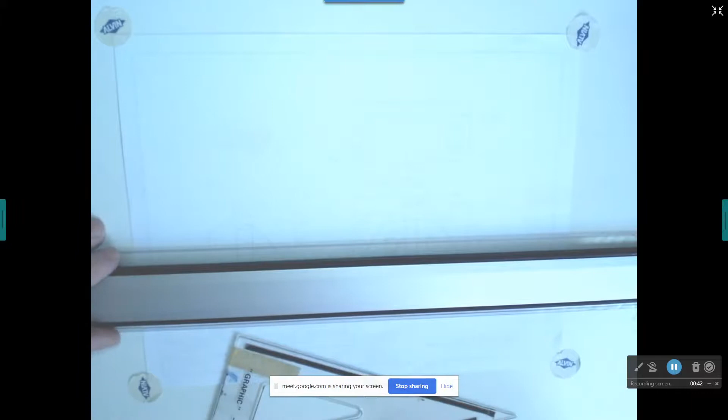So I'm going to move over here to where my drafting table is, and I've got my little portable drafting table. I'm going to show you my triangle here. This is a 30-degree triangle with a 60-degree corner down here and a 90-degree corner up here. We call this the 30-60-90-degree triangle.

And I'm not going to depend on this to draw. I don't want you guys to think that when you draw isometrically you have to have a triangle, but I want to make a point with this triangle.

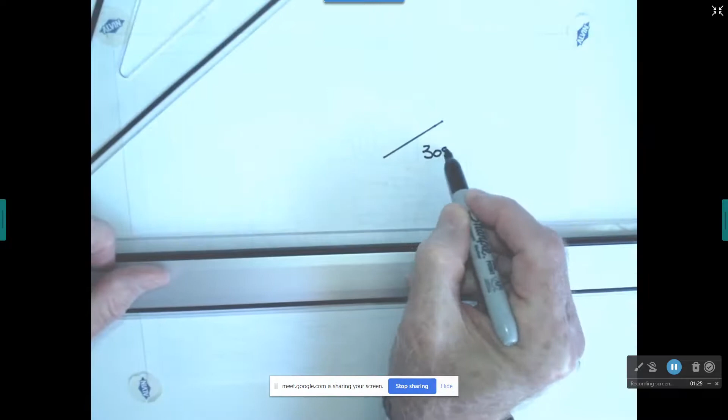So here's what I'm going to do. I'm going to flip this guy around here, and I'm going to draw just a line. And the line that I'm drawing here is at a 30-degree angle, and that's 30 degrees if I measure it to the horizon, like that. Okay, and I'm going to flip the triangle over, and draw another 30-degree line, and put a little 30-degree mark on that.

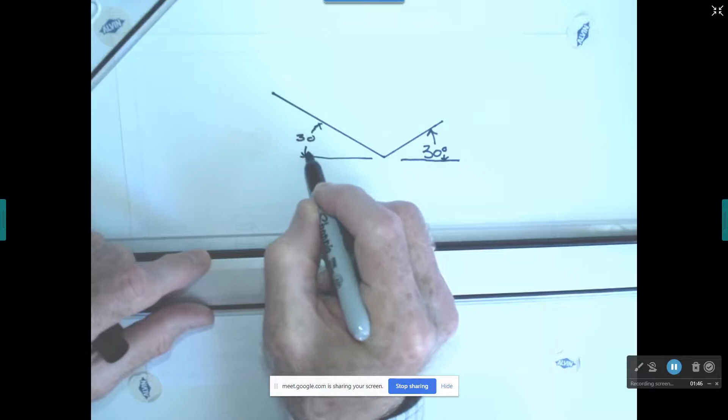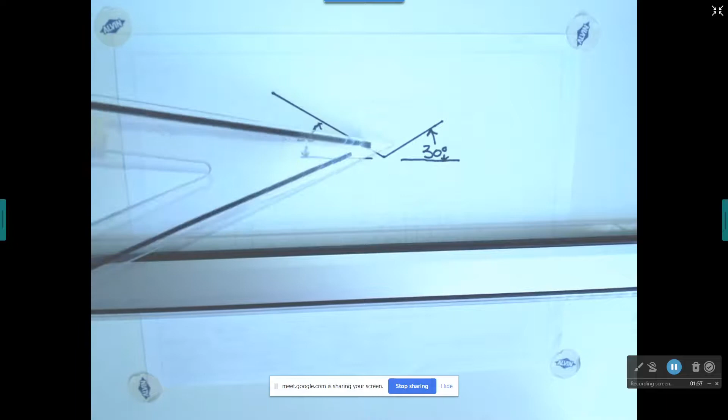So in isometric drawing, you have three axes, and if the planes that you're drawing are normal, not inclined, the angle of the lines you're going to draw in your isometric drawing are going to be at 30 degrees. Any vertical lines you draw are going to go straight up like that. So right there you have the corner of an isometric sketch or an isometric drawing.

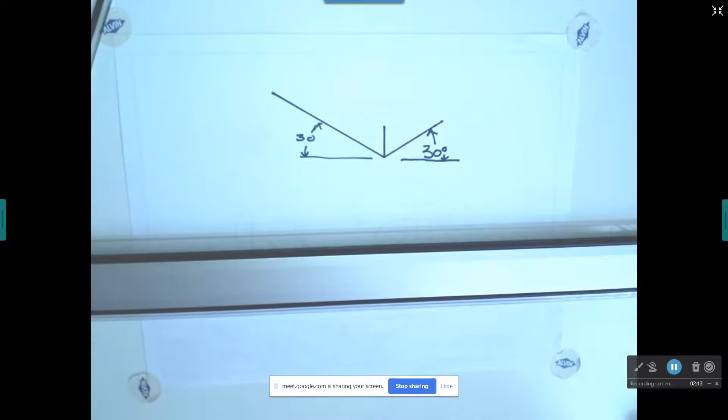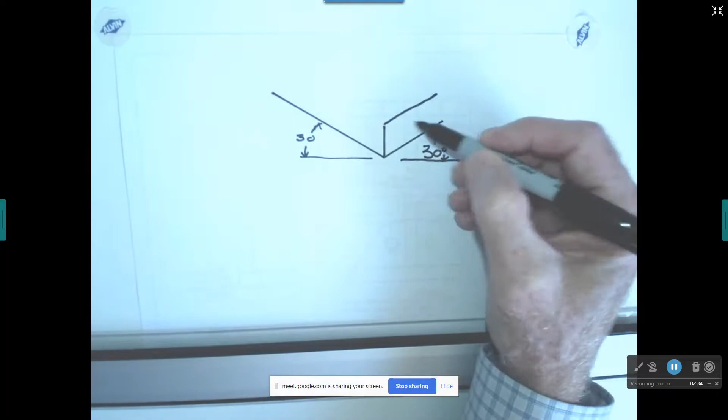Now what I'm going to do, I'm not going to rely on this guy. I'm going to switch over and just sketch freehand now, because the important thing is that you get a concept in your mind of what 30 degrees is, and that you sketch along a 30-degree angle, and you sketch parallel, like in this case it's a perfectly 30-degree right down here.

But you know, when you're sketching out there in the real world and you're doing this real quickly, you're not going to be exactly at 30 degrees, but you want to be close to 30 degrees. And you want this line here to be vertical.

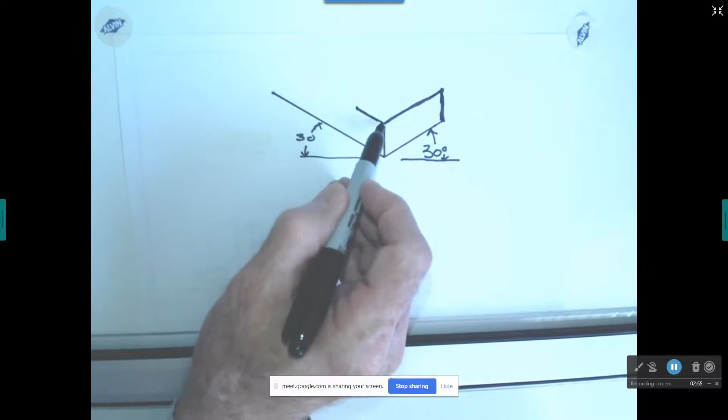Now, over here, I'm going to take this line and run it parallel to where that one was, and come out a little ways. Then I'm going to run a line parallel, running this guy in at 30 degrees, and where they meet, I'm going to stop. So I've created a plane there.

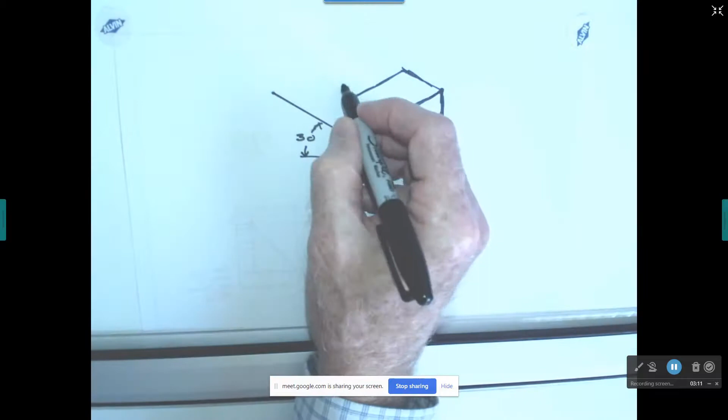So now you're starting to see that this thing is starting to look a little three-dimensional. So I'm going to go a vertical line here and a vertical line here, and I'm going to take this guy at 30 degrees, bringing this straight up like that.

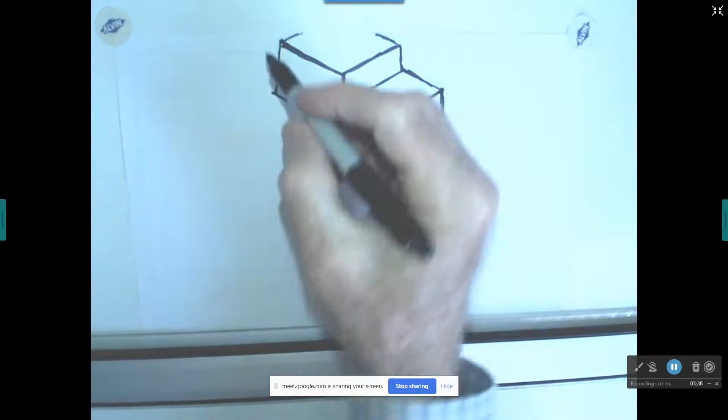And then I would bring this across, and bring this back, kind of having to draw this up near the top of my page because there's several things I'm going to draw on here. But there's sort of an example of an isometric drawing, and so vertical lines run vertically, and horizontal lines run at 30 degrees.

And sometimes, though, you're going to have holes added to those drawings. So there's a couple of holes drilled down through my isometric drawing. If I had holes on this plane over here,

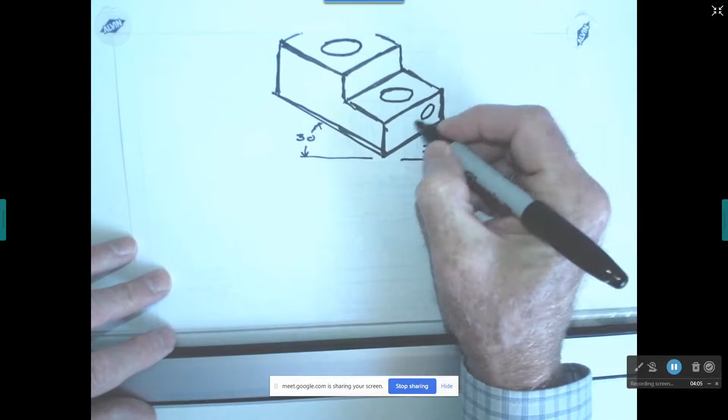they would run at this angle, like right there. And you can see that the angle of the holes that are on these planes up here and the holes over here on this side angle are running at a different angle. And over here and over here you have different angles as well.

Okay, so those are ellipses that represent holes, and those are oriented correctly in this drawing here. And I'm going to explain how you do that, how you know where to put these.

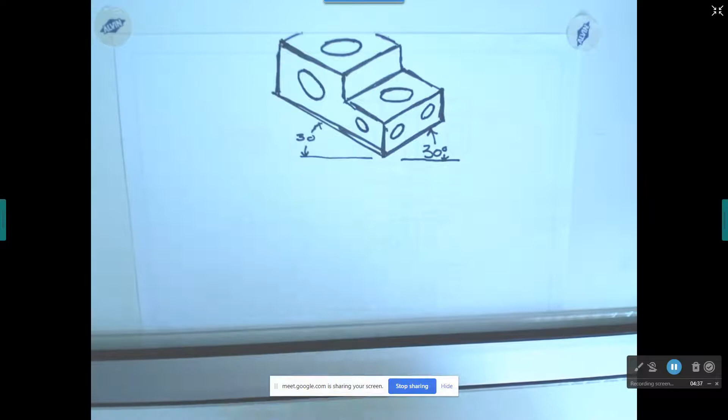Okay, so the first holes that I drew were these guys up here, and I'm going to put some marks on this plane right here so you can kind of highlight that plane. This plane right here is called a horizontal plane.

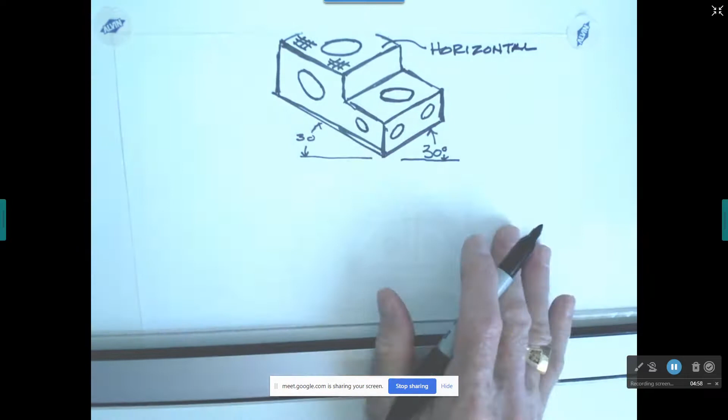All right, because it's parallel to the ground or the horizon, right? We refer to that as a horizontal plane. Now, that's the actual correct word for it, or terminology for it. AutoCAD calls this an isotop plane, like that.

Isotop was not a word that existed until AutoCAD came along. They started working on figuring out how to do isometric drawings, and I think they didn't know the concept of horizontal plane, so they called it isotops. That's what you'll be seeing today when we start working with AutoCAD.

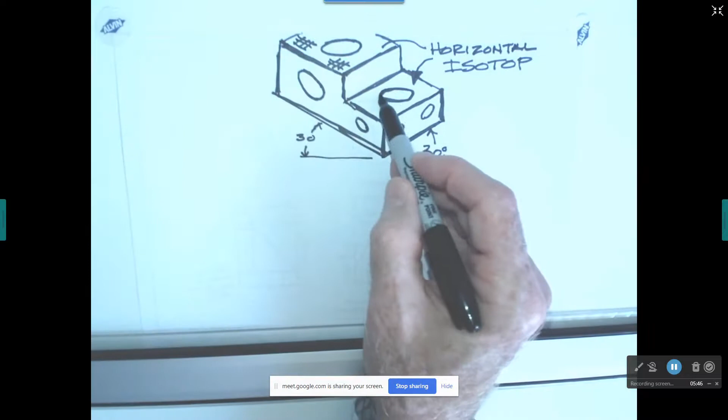So that's a horizontal plane. Whenever you have a horizontal plane and a hole in it, the major axis of that horizontal plane is on a 0 degree line, like that right there. It's just a horizontal line.

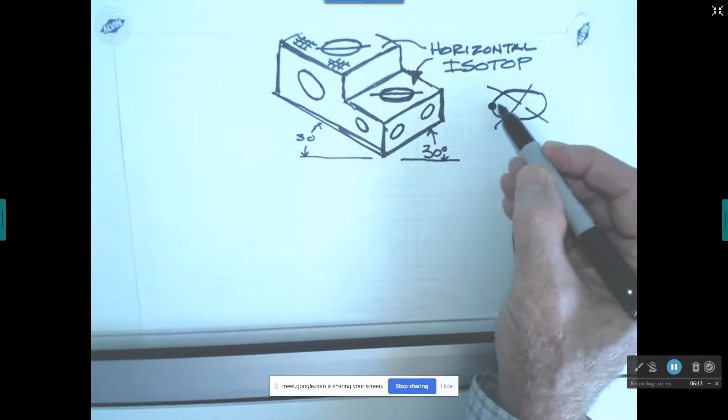Now let's talk about what a major axis is. I'm going to draw an ellipse like this, and you could draw lines through this ellipse at angles and all that kind of stuff, but the longest line you could draw through that ellipse is this line right here, from this point to that point. That line represents what we call the major axis.

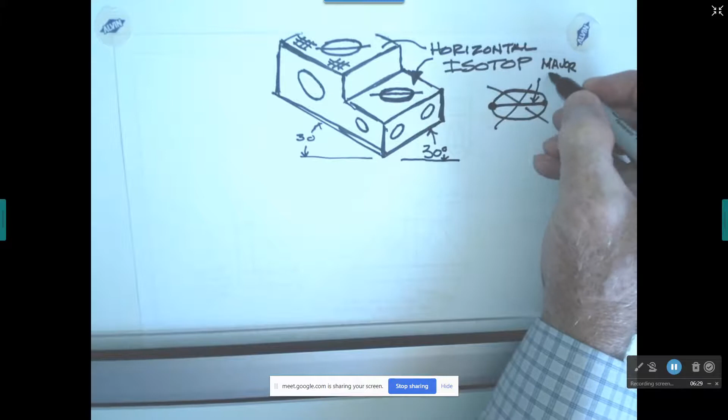We actually align these ellipses along their major axes. Even in AutoCAD, you will have to flip the angle of your ellipses to match what plane they're on. This is an important thing. The way you flip that, AutoCAD calls toggling. I'm going to show you guys - you're going to press F5, and that's how you will toggle.

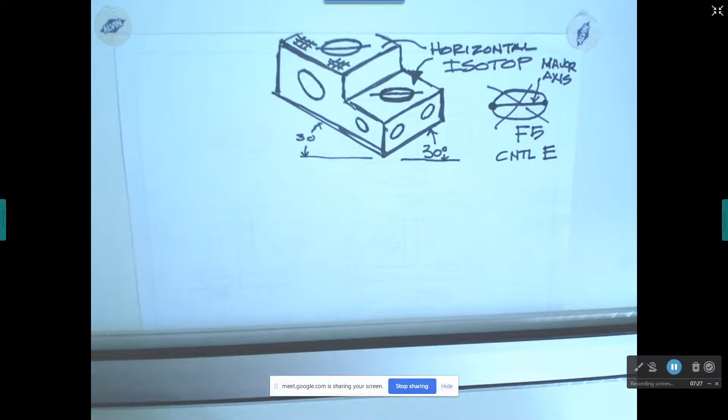Now if F5 doesn't toggle it for you, I could be speaking with anybody using a Mac or a Mac version of the program. Sometimes the Mac doesn't work with F5, so you're going to probably try Control E instead. Control E actually should work even with a PC, but F5 is the function key we use to change these angles. Again, this long line is called the major axis.

The major axis on holes that are on horizontal planes runs at 0 degrees. So this would be 0 degrees right there, okay?

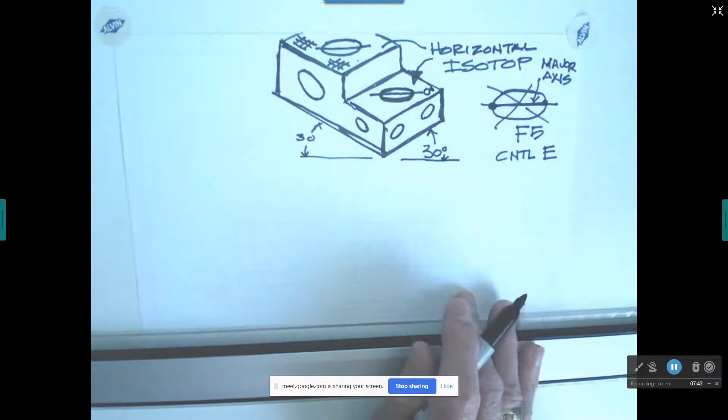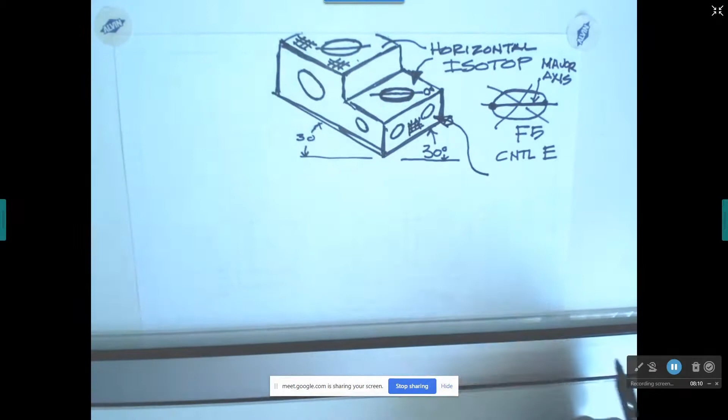So let's look at these holes we have over here on this plane. Let me draw a few lines on it to identify the way it's running. You see this plane right here? This is called a vertical plane because it's perpendicular to the ground - it's running up and down. And because this one goes off toward our right, we call this a right vertical plane.

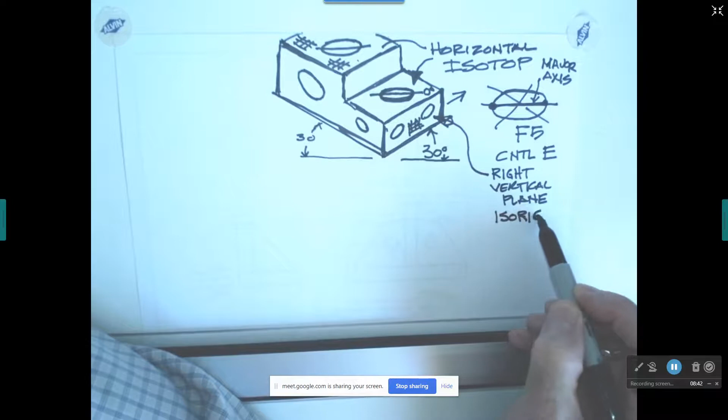AutoCAD doesn't call it that because it doesn't know anything about drafting really. What the designers, or the software programmers at AutoCAD, called this is an iso right plane. So there's two things going on here: terminology that AutoCAD made up, and terminology that students of technical drawing actually use to describe these planes. I want you guys to be students of this, so I'm showing you all the correct terminology.

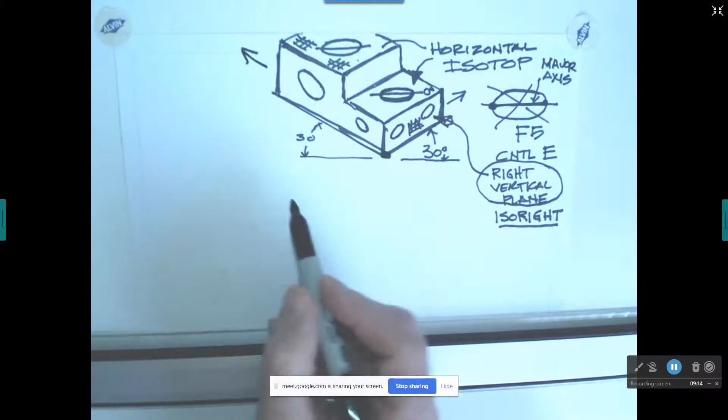Okay, so let's look over here on this plane. This plane is going from our origin point right here, moving back to the left. So this is called a left vertical plane. And AutoCAD refers to this as ISO left.

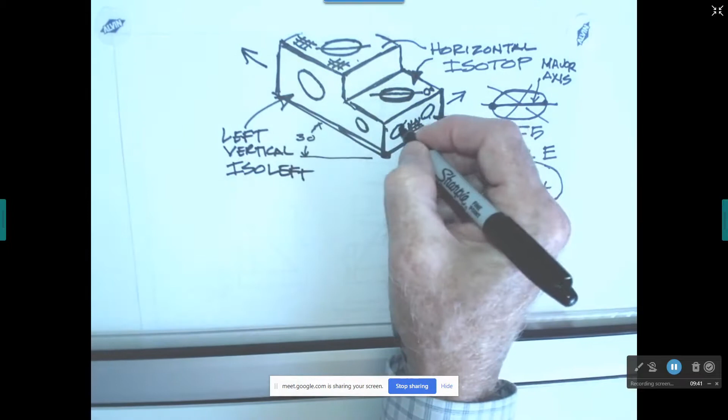Now I'm going to get to the point I was going to make. So you've got a left vertical plane and a right vertical plane, and you can see these two holes I sketched in there on this right vertical plane. The major axis for those two holes on a right vertical plane runs at 60 degrees relative to the horizon.

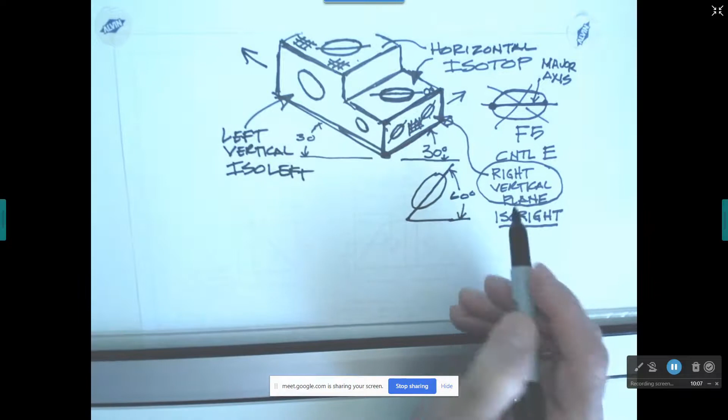So here's what you need to know: your lines are running at 30 degrees, but when you orient the ellipses, they're going to be oriented at 60 degrees. If you don't put them at 60 degrees, they're not going to look right. They also will point up and to the right at 60 degree angles. So whenever you have an isometric hole on a right vertical plane, it's going to be aligned like this.

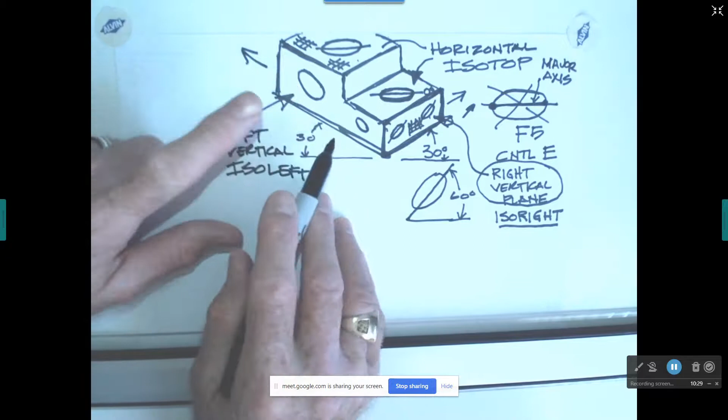Now look over here at these guys - these are holes that are on a left vertical plane. They're also going to be ellipses, and their major axis would lie along that line right there. The angle for those is 60 degrees in that direction. Just like I said, your lines are at 30, your major axes are at 60.

If you want to be a designer, you've got to get this concept into your head, and it takes a little while. So when I was trying to learn this, I started making the one sketch over and over. I'd sketch it freehand, whenever I was sitting in meetings or just bored, I'd draw cubes with holes in them.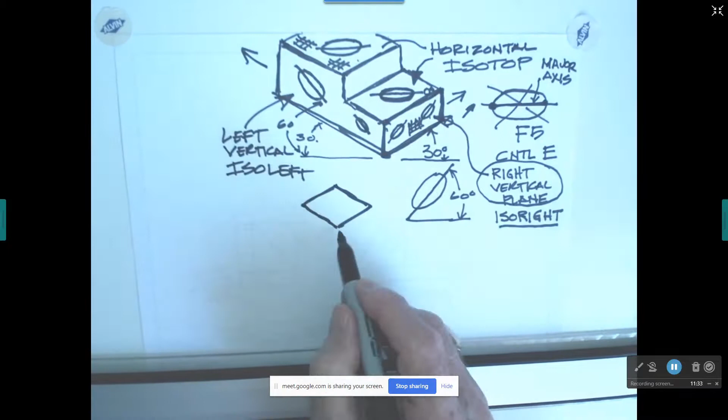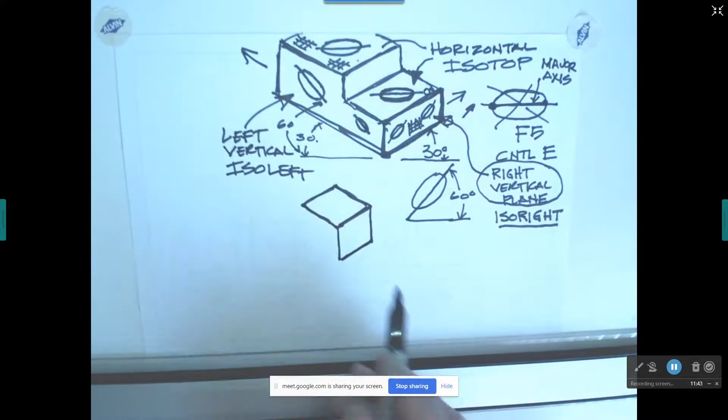So I'll sketch one for you right now. I'd start by drawing a 30 degree line, another 30 degree line, and a parallel 30 degree line, and that would be the top of my cube. From that corner I'd come straight down, and down the same length here, then draw another 30 degree line, parallel to the first. My vertical lines are parallel. Then I'd come over here, draw a line straight down, and another line parallel to this one, and there's my cube.

I'd practice this over and over, trying to get my 30 degrees down and my 30 degrees in this direction, like that. And then what I'd do is add holes to it.

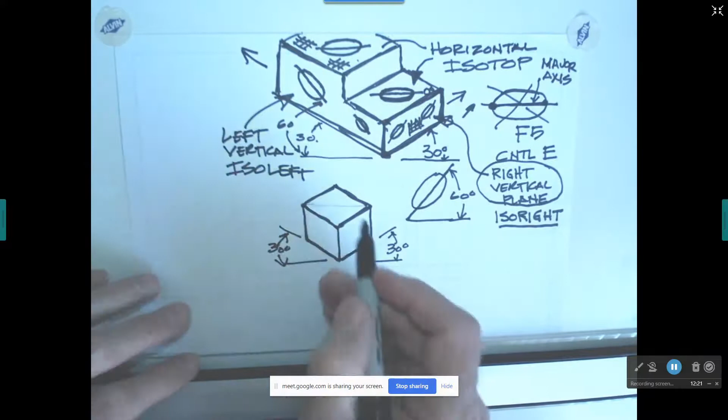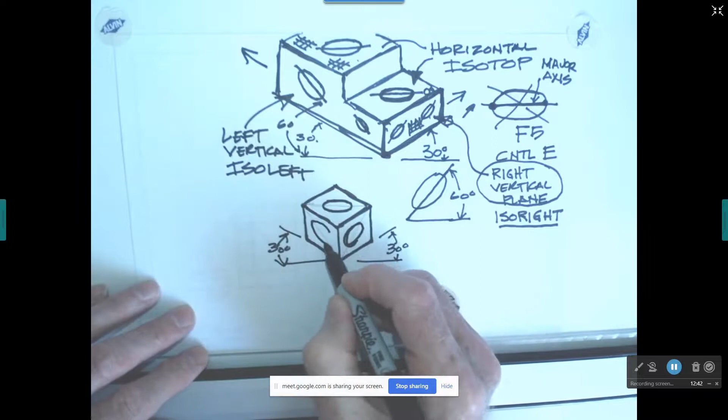So going up here to this top view, I want to show you: if you draw a line from this corner across like that, your major axis, if this is a cube, would lie on that line. If you connect these two corners here, you've got a 60 degree angle, and if you connect these corners over here, you have a 60 as well. So if you draw your ellipse along those, you'll have your ellipses oriented correctly.

This is good practice, just start making it part of your day. If you've ever got a pencil or a pen in your hand, sketch.

And then I'd recommend not only sketching but also practicing your lettering while you're at it. Remember, with your lettering, you want to make your letters wide, and use all caps, and so on.

When you put all of this together, you start to look like a designer. You're sketching the way designers sketch. And you won't look like an idiot out there in an office when you start sketching, instead of it looking like you sketch and letter like you did in the second grade.

It's something you ought to practice, and I'm telling you that here in 1405. You're going to go take all these other CAD classes from ACC, and you won't have to sketch a lot in most of those classes because they'll be focusing on the CAD. So if you don't practice this, you'll get out into an office where everybody around you is sketching and lettering as they design, and you won't look like you know what you're doing. It's definitely worth working on.

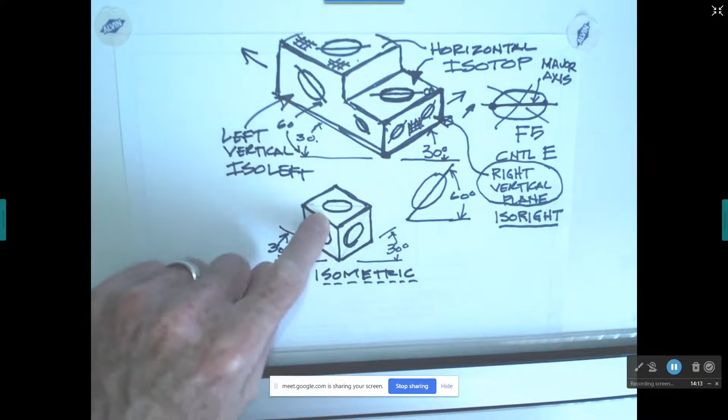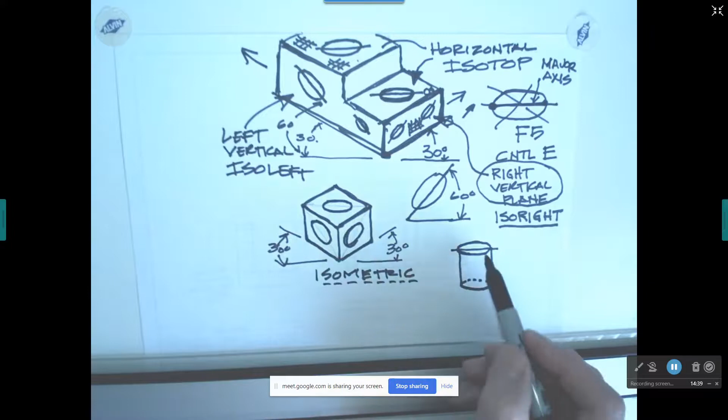Now I want to show you some other things about what I sketched here. Once you understand the orientation of those ellipses, here's what you can do. If you need an upright cylinder, you just sketch one of those ellipses on a horizontal surface like that, then bring it straight down on the sides and repeat that ellipse. It would be hidden in the background back there, but here you have a vertical cylinder.

Now I'm going to sketch one and show you how the center lines ought to go on that. The major axis is not a center line for this ellipse. The center lines are on 30-degree angles, and would look something like that. Then because this is a cylinder, it probably has a center axis, which would run right down through the middle and come out of the bottom. Look at that, all of a sudden you look like you're a designer.

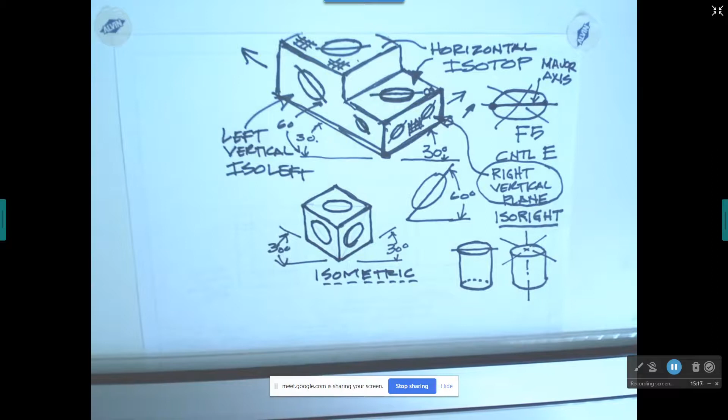So if I need a vertical cylinder, I know to orient it at 0 degrees. If I need a horizontal cylinder, one lying on its side, I draw that 60-degree ellipse. My lines here go at 30, and then I repeat another one of those 60-degree ellipses over here. Now my center lines on this one are going to be vertical, and also come at 30 degrees, and then I'll run a 30-degree center axis down through the middle.

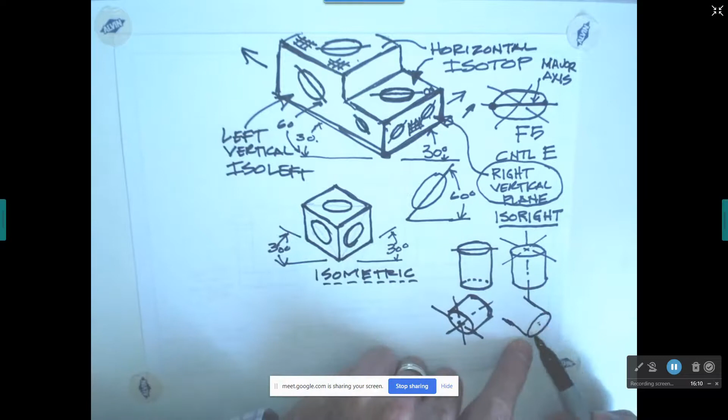And if my cylinder needs to be going this direction, this is at 60 degrees. My lines here on the side, I'm going to run at 30, and then I'd just copy this ellipse back here. The reason I'm showing this is that's how you'd do it in AutoCAD: you'd place your first ellipse, draw your lines on the side, and then copy this ellipse back.

Okay, so that ellipse would go there. It has the center axis running down through it. It has a vertical center line, and it has a center line running like that.

If you needed a counterbore shape, you would draw one ellipse with a little bit of depth. Right at the center of where this ellipse would be, imagine there's a smaller ellipse. I'll add that at the bottom. I'd draw a smaller ellipse, come down from where the sides of that would be, and add this ellipse down here at the bottom. And so there is a counterbore, with the center axis running down through the middle of it.

Now, I know some of you guys are interested in architecture, so I'm going to make a couple of architectural sketches here, and I've saved enough room for the architects, so don't worry about that. First thing I want to show you is how we handle inclined planes in an isometric drawing.

Let's imagine you have a front view of an object that looks like this, and the side view looks like this. If I had to draw that isometrically, I would label it first: this bottom edge as A, this side edge as B, this as C, and this side over here as D. This plane right here is an inclined plane.

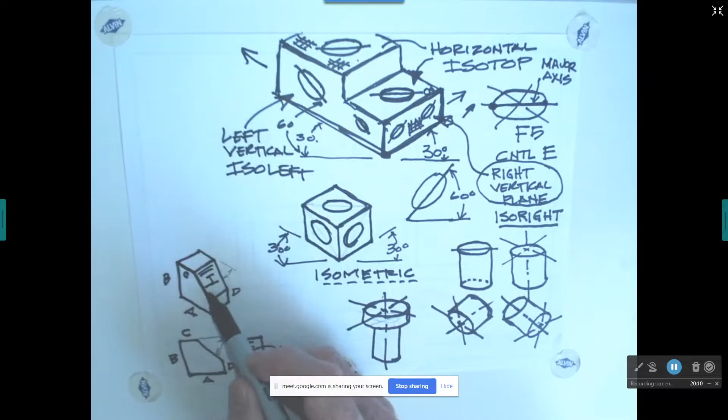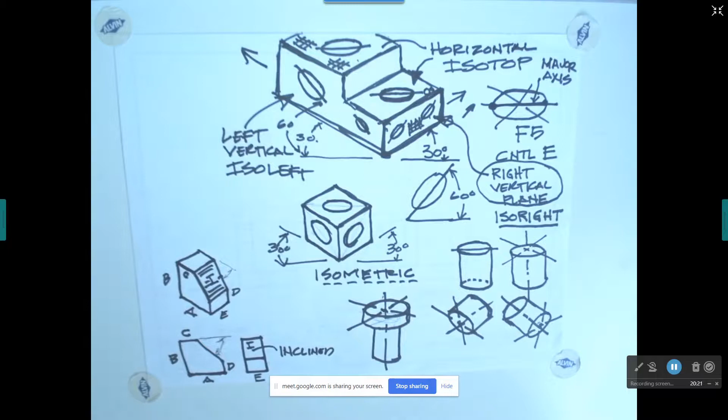Now, I said I was going to do something for the architectural types, and this is partly for them. What I want to get at is, what if you just sketch a house, front view of a house real quick.

Let's say this is the front view of a house, and you're sketching for a client to show them the house you're going to design for them. So there it is, pretty simple. I would label these lengths here: this is C, this we could call D, E, F. And if I have that, and also a side view of that house where I know how long it is, here's my side view of it.

So I'll need to know what that distance is right there. Okay, so I'm going to come in here and sketch that. The first thing I'm going to do is locate a corner, like that corner right there.

I'm going to go distance A at 30 degrees. Then I'm going to call this distance right here G, and I would take G back at 30 degrees. And then I would add B, which is going to be a vertical line, that guy right there.

And I would add F, right, that distance right there. And then what I would do is go to the center of this, and measure this distance from here to here, straight up to the peak of that roof right there.

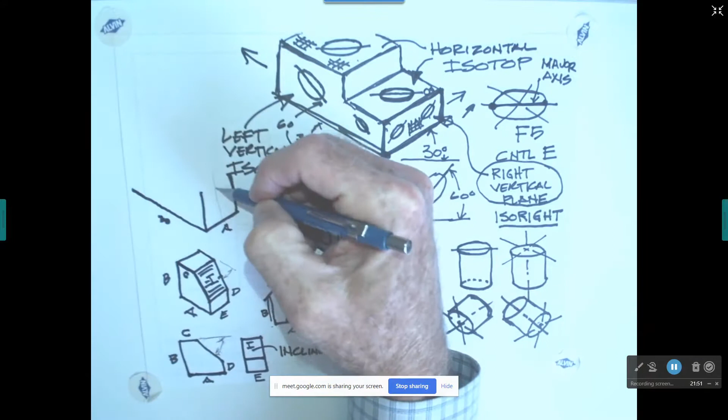And I would come in here and transfer that in, and locate that point. Then, from that point, I would bring down the side of my roof, and bring this one down through F, which is this point over there. And then I would bring this back at 30 degrees, and this back at 30 degrees.

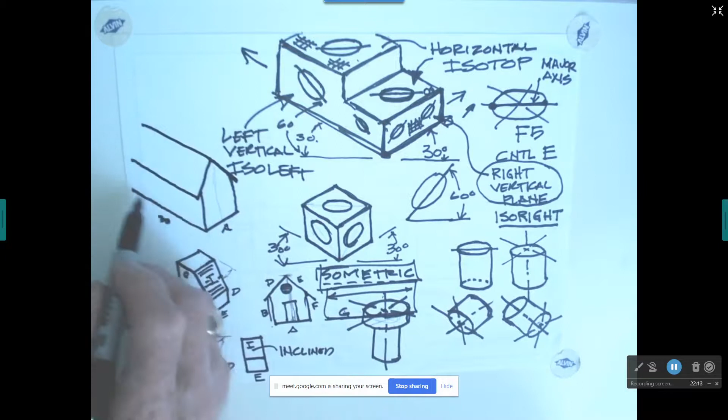I would use the same distance that it was in the side view. And so you can see I'm starting to get an isometric drawing created. We'll erase that guy out right there.

Now, how do I handle the front door? Well, I measure over that distance right there, measure over here, measure over from the side to the front door, and then go straight up the height of the door, which would be about 80 inches on a normal door, across at 30 degrees, and then drop straight down.

Now, I also added in a roof vent, an attic vent right here, and it's round, and it has these louvers on it like that. That's what you would be seeing right here. So now I'm going to add that.

I know it's going to be an ellipse, and if I look at my three planes here, which plane is it going to be on? Well, this is a right vertical plane that I have right here. It's pointing back to the right. It's up and down. So my ellipse needs to run at 60 degrees, its major axis.

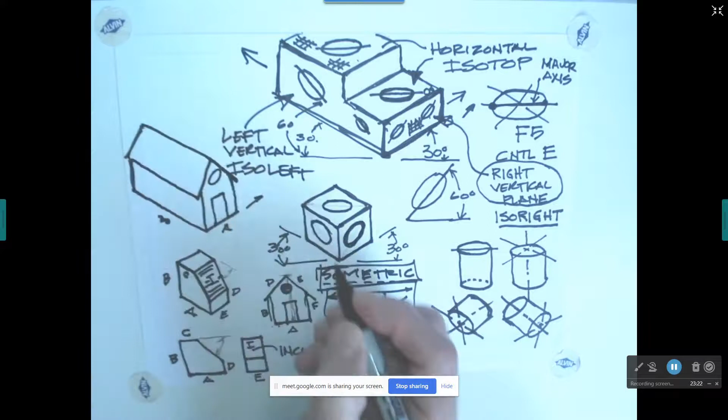And so it's going to be sitting right up in here, running at 60 degrees. But these lines that you have right here are going to run at 30 degrees because they're parallel to A right here. So you're going to draw them at 30. So even though you drew your ellipse at 60, there you go.

So even if you're doing architectural work, being able to sketch quickly, isometrically, is really a good skill to have. And so it complements everything that we've been learning about doing front view, side view, and top view.

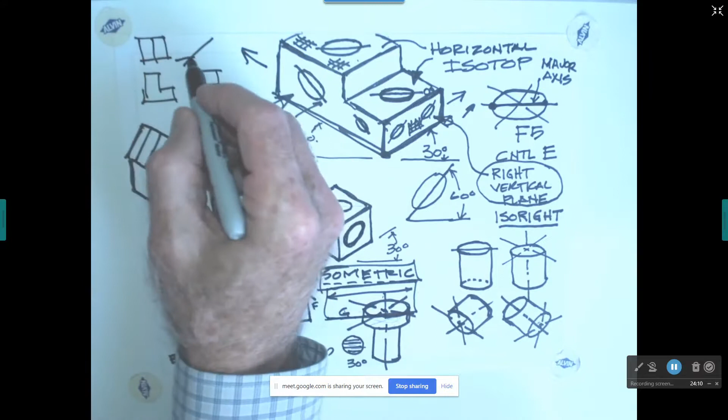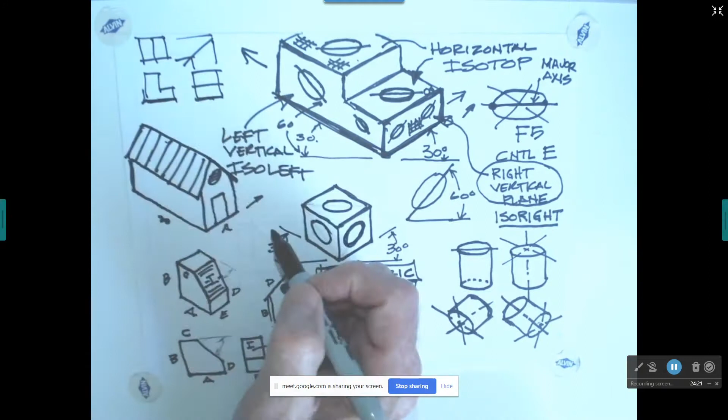Our 45 degree in there. All right, because if you can take this line here and this line here and figure out what that distance is and what this distance is from looking at these views, and then take this height right here and put that in there, this length here, so you can relate. So really everything that you have drawn as a front, top, side view would be actually pretty easy to draw isometrically once you get the hang of it.

Okay, so if anybody has a question about that, feel free to unmute yourself.

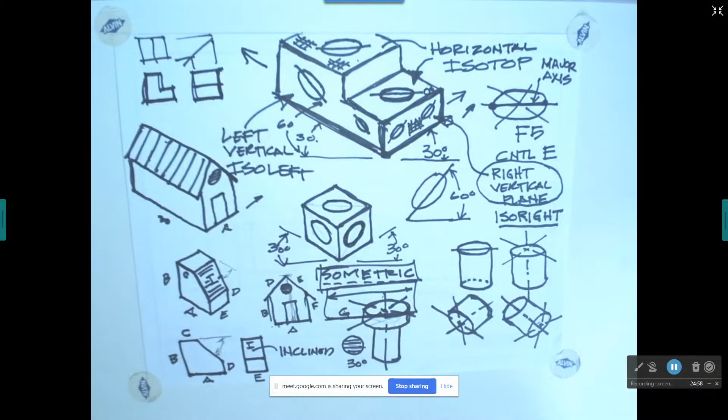But what I'm going to do next is switch over to AutoCAD. I'm going to show you how to translate this into making AutoCAD drawings. All right, so let me do this, and let me get rid of this guy.

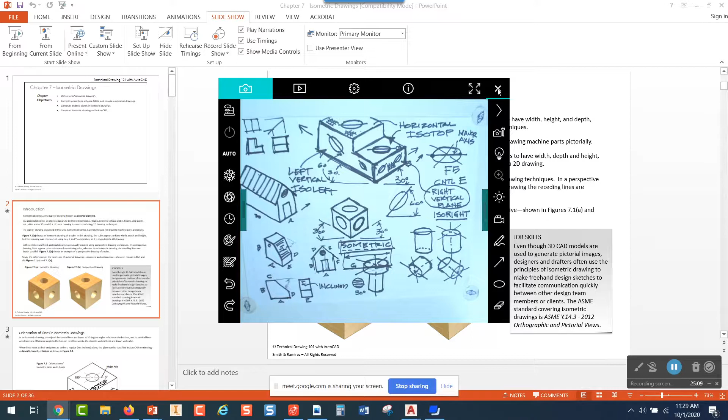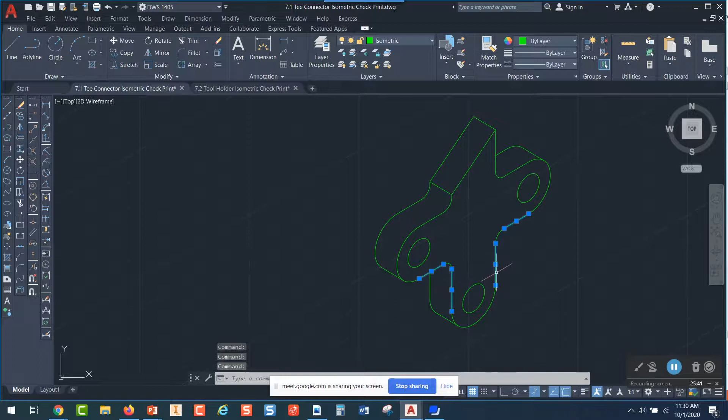Okay, so on your monitor there, you can see an example of an isometric drawing done in AutoCAD. And so this line here and this line here, those are at 30 degrees. These are vertical right here, and these are those ellipses that I was showing you that run at 60 degrees on their major axis. Then you have this weird inclined plane.

This is actually your first assignment, and I want to point it out to you in the book. If you look in the book on page 330, you'll see that this is project 7.1. It's called the Tee connector. Kind of looks like a T, and it has some holes.

You could probably run some screws or bolts through or something and tie some things together. Not sure why there's this 37-degree angle in there, but if you look at the sketch at the top of the page, you can see all the dimensions that you would need to draw this. Okay, now in Blackboard, there's also a video showing you how to draw this.

You can either follow the directions in the book and try to draw it that way, or you can play the video. Probably watching the video is not a bad idea, because there'll be more explanation as you go through watching the video of why you're doing what you're doing with AutoCAD.

You can see that in step 1 it says to download the Imperial prototype. The Imperial prototype is already in Blackboard. So if you open chapter 7 in Blackboard, you can directly open the Imperial prototype and do a save as, and name it Tee connector. Put that in your home folder. Then it says activate model space, which I'm in right now.

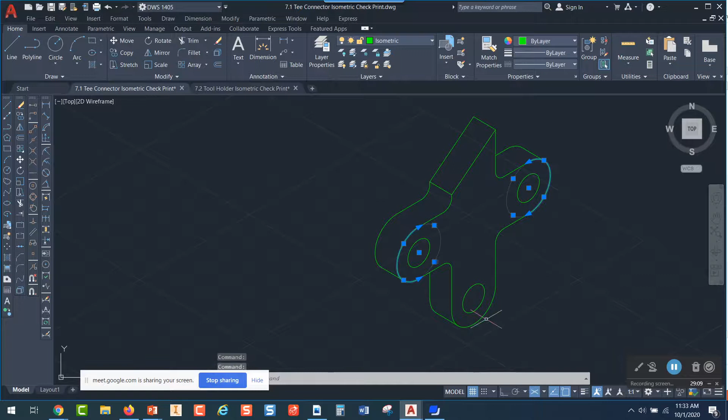None of the ellipses that you see here would be drawn with ISO top on. All of these ellipses, including the ones out here that you're going to be trimming, are actually drawn on a right vertical plane. So when you draw those, you'd press F5 until it looks like this right here. That's how AutoCAD knows how to orient your ellipses - it knows to orient them at 60 degrees. It just doesn't know what plane you're drawing them on.

So you have to tell AutoCAD, okay, I want to draw ellipses on the right vertical plane, and you've got to be toggled to ISO right. Again, here's ISO left - you can see these ellipses don't line up with ISO left. And then that's ISO top. Now on your next assignment, you'll do some isotops and get some practice at that. So I've got that set to ISO right.

I want to show you how to put in an ellipse. I'm going to go over here to my draw toolbar, and there's an ellipse command right here. You also have an ellipse command up here. I'm going to pick on the ellipse, and there's an important step you have to do after you pick on it.

AutoCAD doesn't know you want to draw an isometric ellipse yet. So look right here on your command bar - you have arc, center, and ISO circle. AutoCAD calls an isometric ellipse an ISO circle. There's another one of those stupid made-up words they've put in here - like they couldn't call it an ISO ellipse, it's got to be an ISO circle. Well, it's not a circle, dude. So anyway, you pick on ISO circle.

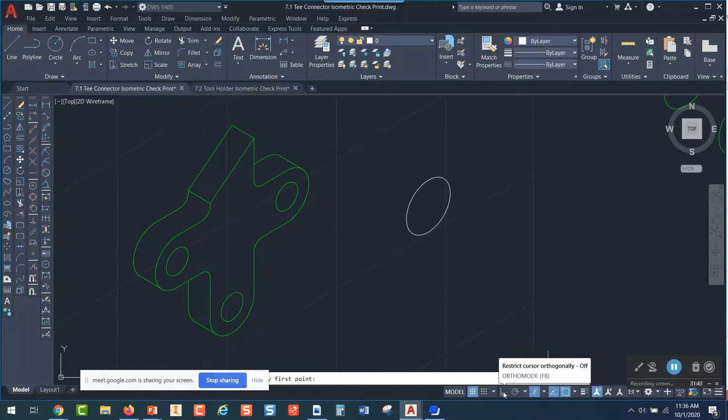I'm going to pick on ortho mode here. I think ortho is probably the better tool to use when you're doing an isometric. Remember, you can turn ortho on and off with F8, so you'll be using F5 and F8.

It says specify the first point. I'm going to pick right there and see what it does with ortho on. I can move in that direction, but those lines are at 30 degrees. The other way it will let me move is straight up and down, but I'm restricted to 30, 30, straight up and straight down. So I'm going to go in this direction.

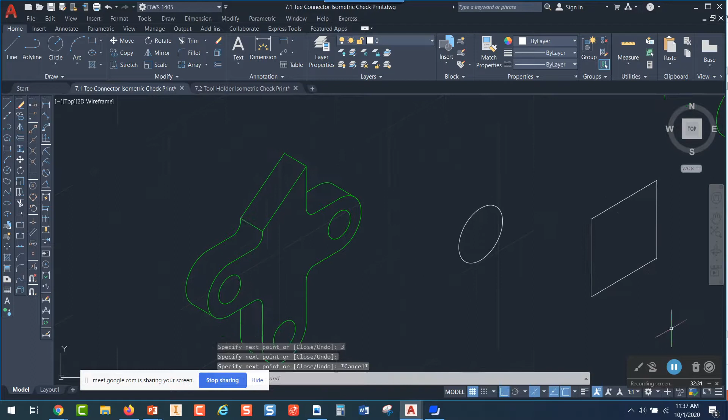I'm going to type 3 and press enter. Then I'm going to move straight up and type 3 and press enter. And then I'm going to move in this direction and type 3 and press enter. Then I'm going to come back to my start point and pick, and press escape. So there's a vertical plane drawn in as an isometric.

Now I'm going to press F5 and change to the ISO left axis. I'm going to pick on the line command, pick right here, go in that direction, type 3. I'm going to come straight down, type 3 and press enter. I'm going to come to right there.

And then what I could do, I could use copy. If you pick on that line and then press enter, and it says specify a base point, you could pick at that corner, that end point right there, and just copy it right there, press escape.

You could press enter, it will bring you back to copy, pick this guy and press enter, and pick right here. And look, I'm trying to move up there, but AutoCAD doesn't want to go that way. I need to press F5, and then I can move to there and pick.

Now I'm going to draw a line from corner to corner, because what I've drawn is a 3-inch cube, 3 inches on all sides. I'm going to draw a line from here to here, and from this corner to this corner.

Now I'm going to go back to my ellipse command. I'm going to pick on ellipse and choose ISO circle, and look at how my ellipse is oriented - that is for an ISO top. So this would be an ISO top. I'm going to snap to the midpoint of that line right there, pick on diameter, and type 2 and press enter.

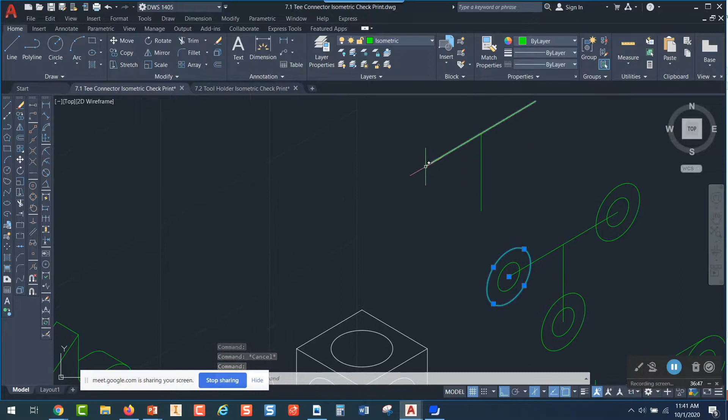Then draw 6 concentric circles, 2 concentric circles at each of the 3 endpoints. Draw a 1-inch diameter ISO circle and a 2-inch diameter ISO circle. This is a 1-inch diameter ISO circle, and it would match this one except this is 2. This is the 2-inch diameter ISO circle, and they're drawn right at the end of that line. You would do that again at the end of this line and the end of this line.

Now, what the ninja would do is not draw those manually. They would select these and use copy. When it asks for your base point, they'd pick at that endpoint, then pick at that endpoint, and pick at that endpoint, copying those. But you probably need the practice drawing ellipses anyway, so if you draw those ellipses it won't hurt you.

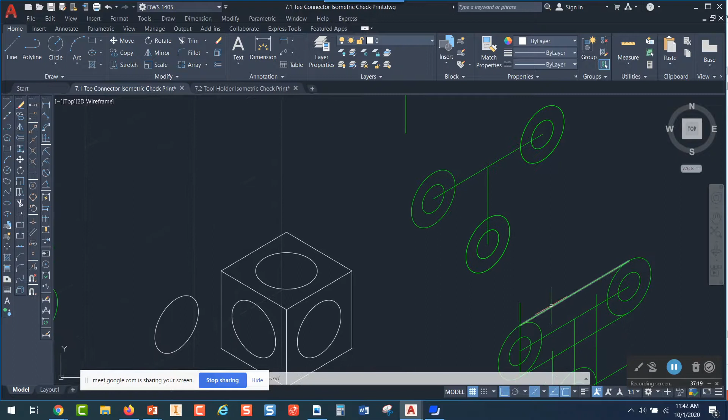Now here's the thing, we need to draw lines that are tangent to the tops of those ellipses. If you go into the line command and go over here to this ellipse, you can see it's hopping around, kind of confused because it's an ellipse. It's not finding the quadrant. When you go over here it's looking for a tangency, which is good probably, but we need something from the quadrant right here.

So what you have to do is draw a construction line from the center, straight up like that. Then you can pick on it and stretch it down. This construction line allows you, in the line command, to find that intersection and then go tangent like that, drawing the line from your intersection to tangent here.

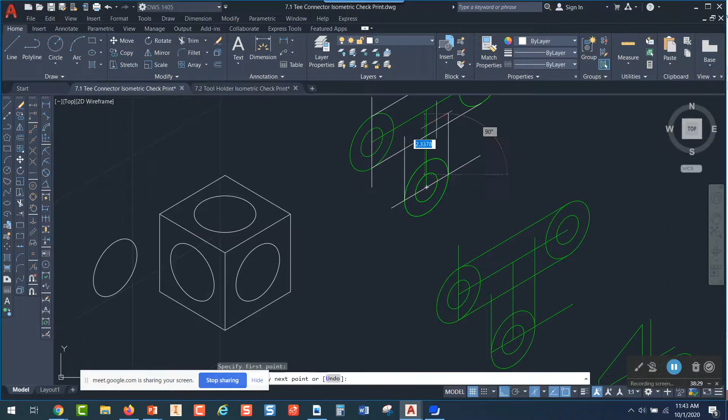I would do the same thing, drawing a line across here from my center point, with ortho on, which is why I know it's going exactly 30 degrees. Now I can find a line from that intersection and draw it up, and draw a line from this intersection and draw it up like that. Eventually you'll have this constructed, then you'll go in and trim all this stuff out until it looks like this guy right here.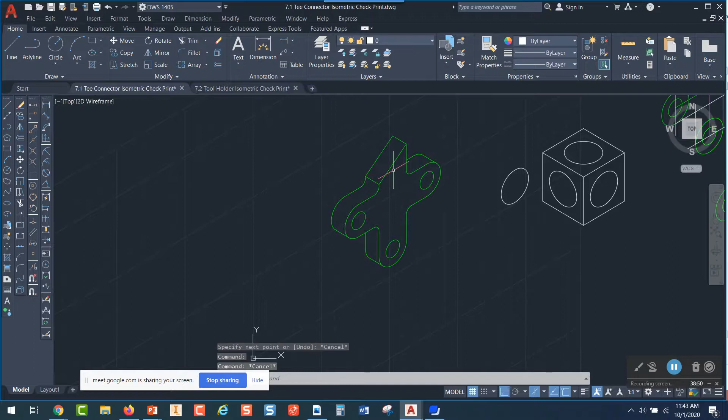Now, once you have this drawn, the video will show you how to do this next part. I'm going to press F5. You're going to copy everything on this front edge that you've constructed.

Let me just grab a bunch of that. I don't know if I've got it all or not. Then you would copy, pick a point, and move back 1 inch, but I'm going to go 3 just to show you how far back it will go. You see, I can copy that back, and then all I have to do is draw lines that connect it. That's how you get the thickness of this guy.

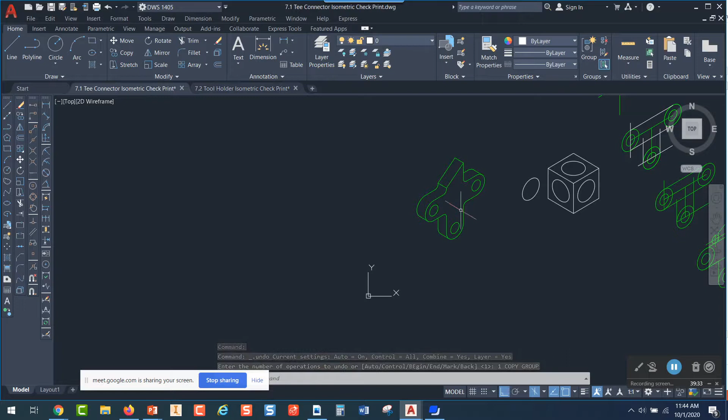Let me undo. The way you get the thickness is once you have the front part drawn, copy it back 1 inch, connect the lines from one plane to the next, and then trim everything in the background to get the Tee connector to look like that.

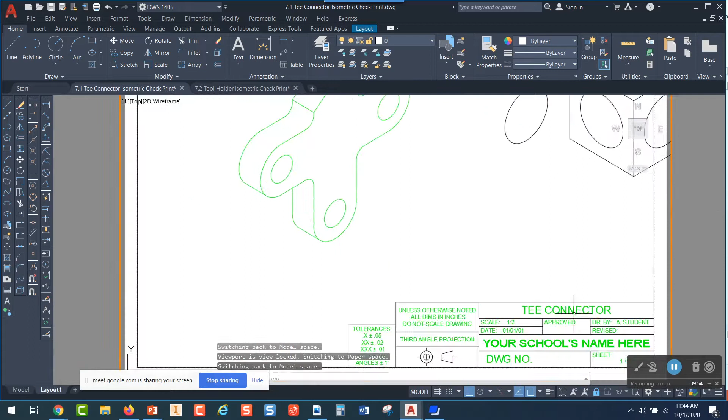So that is the first assignment. You would go into your layout tab and print it as a PDF. It'll be called Tee connector. Remember, you can't edit this text if you're in model space - you've got to pick on it, then you can come in and edit the stuff. So you'll have your Tee connector, and you can email that to me.

Now I want you to turn to page 334 in your hymnal, and look at the top of the page - you'll see your old buddy, the tool holder. You've already drawn this and put dimensions on it, at least most of you have.

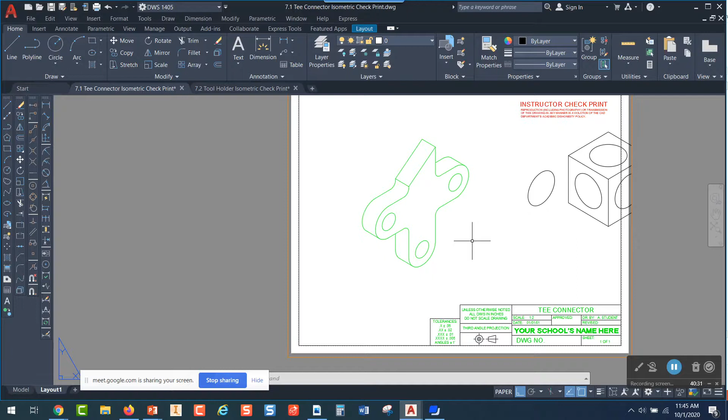So what you're going to do now is open up the drawing you made last week, which will have the front, top, and right side view of the tool holder with dimensions, and it'll have this note. So you're just reopening the tool holder, but you're going to add this guy.

You're going to add that isometric view of it. If you look on page 334, it gives you the steps, and it even shows you step by step how to construct it. By the time you get to the bottom of page 336, hopefully you'll have your view.

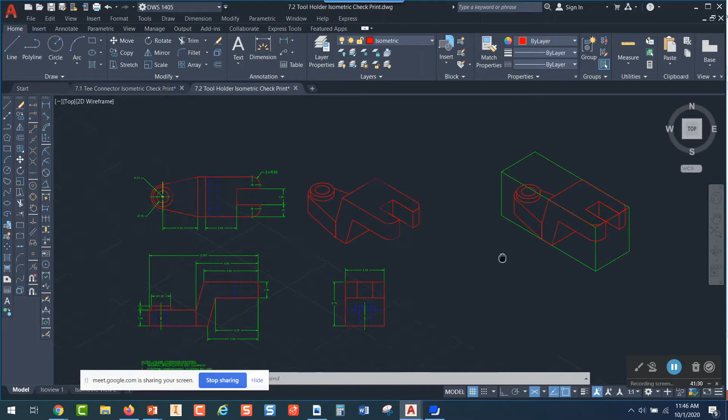Now, what I think is important, if you look at the bottom of page 334, you can see what's called a bounding box. A good way for beginners to start is to look at their parts and say, okay, this thing is 7 inches long, 2.5 inches wide, and 2.75 tall. So before you try to draw your isometric, you draw a line right here that's 2.5, a line straight up that's 2.75, and a line in this direction that's 7.

And then you could copy these lines. So what you're doing is creating what's called a bounding box, and your part will fit inside that bounding box. It actually helps you draw because you've got it there.

The approach is like, remember Michelangelo, the artist, he was a great sculptor. He always said he would just get a block of marble, and what he wanted to carve was already in the marble. He just had to knock away the edges and all the stuff. That's kind of the approach here. The bounding box represents your piece of marble, and you're going to trim away at it. You're going to construct and trim, and eventually you'll be left with this piece right here.

The reason I think having the bounding box is important is, let's say you're trying to figure out where that line is right there. Well, we know that line is 0.75 from here to there. So if I were constructing that, I would use the copy command, pick that line, press enter, and it says select a base point. I would actually pick out here in space, make sure ortho is on, which is F8, move in this direction, type 0.75, and press enter. So you see how by copying this line over 0.75, that gives me the edge of that cutout.

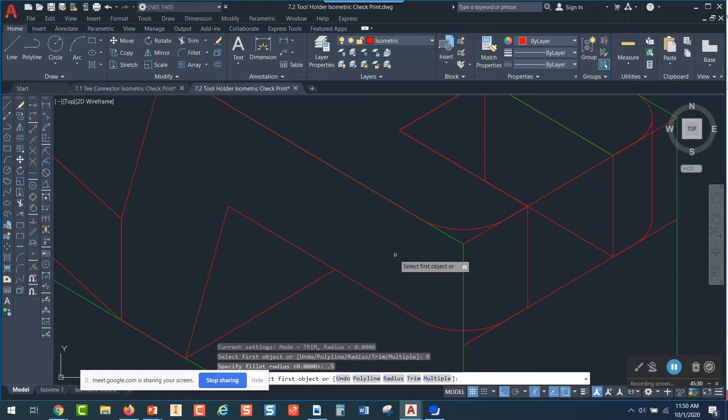Okay, so the thing I want to show you about, and then I'll cut you loose, I'll show you where this is in Blackboard. You would think you would use the fillet command on this, but AutoCAD has never made fillet work right in an isometric drawing. So if you use fillet, go right here, and you know your radius, pick on radius, type 0.5, press enter, and even press F5 to get in the right orientation. If you pick here and then pick there, look at the difference between the fillet and what it looks like using an ellipse. The reason it doesn't work is that the fillet command draws round fillets, not elliptical fillets. That's why your drawings won't look right if you use the fillet command.

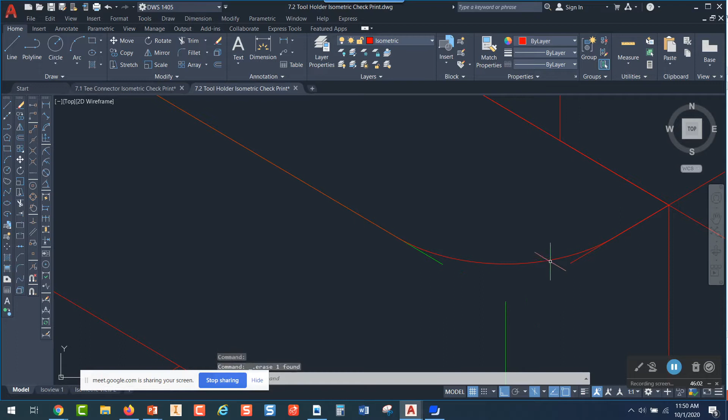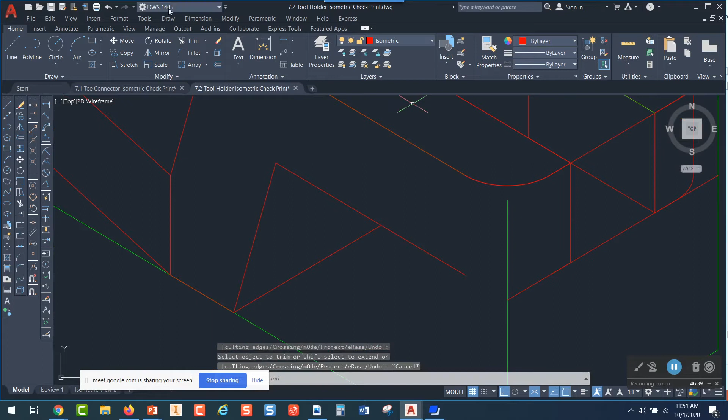Instead, what you have to do is use the ellipse, iso circle, and draw it like that. Using ellipse iso circle, you'll get an elliptical ellipse like that right there. Then you'll go in and do a trim, trimming all that stuff out to get to your shape, and eventually you'll start trimming these corners out to get your front corner. Then I would take that ellipse and copy it straight down 1 inch to get it to right there. Instead of trimming that, you just copy it.

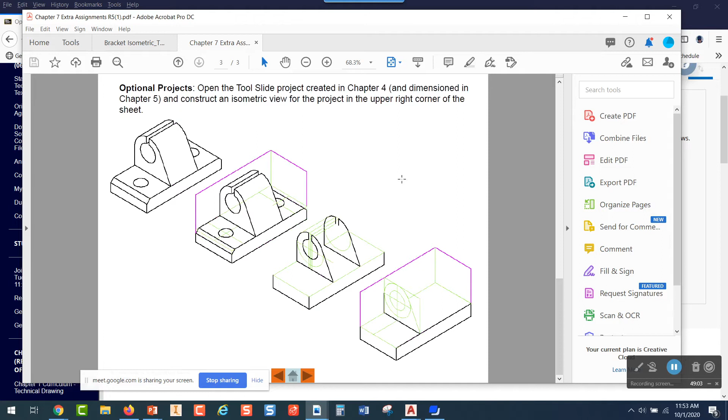Now you're not required to do these, these are all extra credit. Here's how I do extra credit for this class. If you draw this correctly on the bracket project and submit it to me, I'll put a +1 in my grade book, and whenever I calculate your final average, I'll add a point to it. So if you do this one and the other one, I'll add another point, and if you do this one, I'll add another point. So let's say you've got an 87 average at the end, well, I'll add 3 points to that and you might make an A in the course. So you don't have to do these, but they're available for you to do if you want.

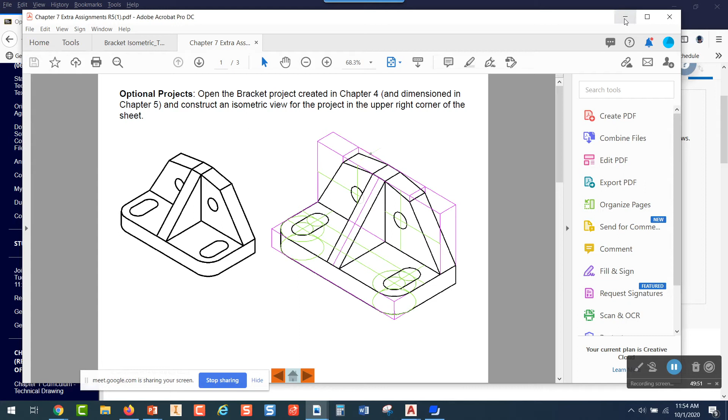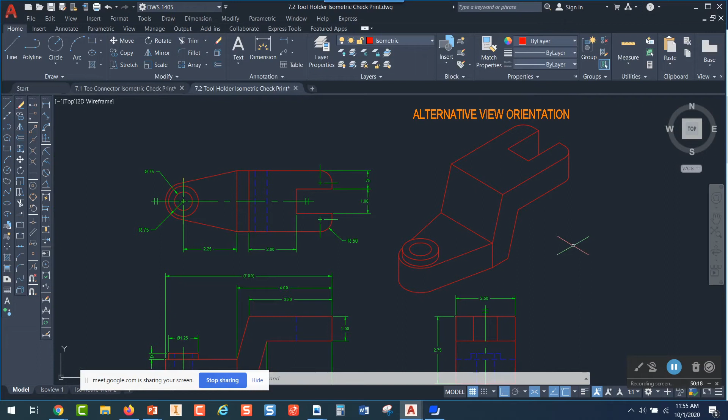Let me show you another opportunity for extra credit on this one. Right here, okay, so you're going to draw the tool holder where it will look like this, this will be the orientation. If you were to also draw it where it looks like this, because there's no directions and no video for this, if you draw it backward in addition to the other way, I'll give you an extra point for doing that as well.

Okay, so that's the assignment for between now and next Tuesday. On Tuesday we'll start a new assignment. So you just need to get the Tee connector done and get this guy done, and you're done. And then you can do the extra credits if you want to.

That's up to you. Okay, so does the offset command work correctly? No, it doesn't. Yeah, okay, so you're asking even on lines probably, is that what you were getting at? Yeah, the offset command doesn't work correctly either. You've got to copy, okay?

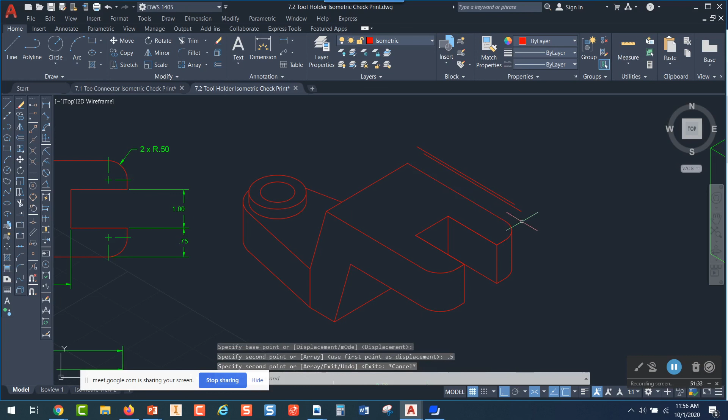Because if you do an offset, let me go to offset, and let's put a 0.5 offset in, press enter, and I pick on this guy right here and pick. What it does is when it offsets it, it offsets it parallel, so it kind of goes straight up. It doesn't... let me show you the difference between copying something 0.5. If I pick right there and enter and pick, and I move in this direction and I go 0.5, you see where it hits at a different place than if I offset it. So don't use offset and don't use fillet.